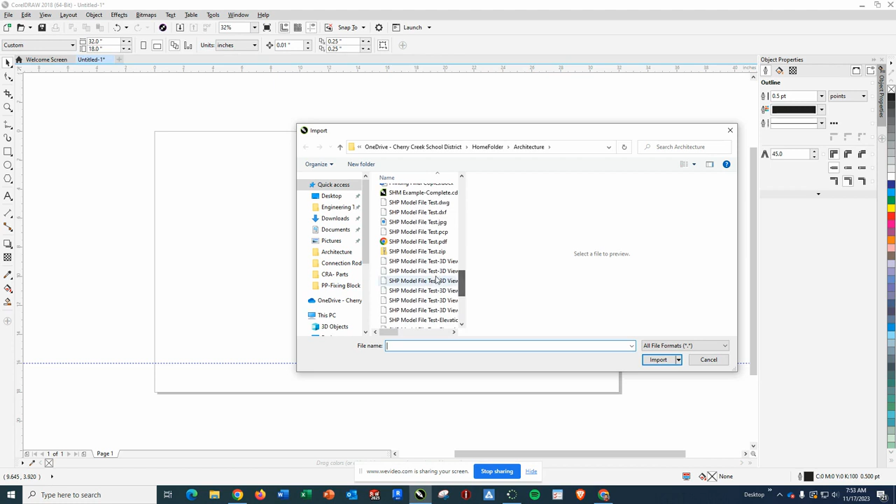So we'll go to Import. We will go to our folder where we've saved everything. We will find our house model PDF. We're going to go ahead and import, and it's going to import text as text, which is fine because we'll actually get rid of it. And I'm going to put the top corner up in the top corner here. And it's going to put everything down on the board. And it looks like all my edges look pretty good.

So now here's the first thing I'm going to do. I'm going to change the outline color. We want to do it first down here to make sure we set the color panel right. So the first thing is we're going to change width to hairline. All of our lines need to be hairline lines. Second thing, we're going to change the color.

Now we want to go to the color swatches. We want to make sure that we're on the RGB palette. So if yours doesn't say RGB, drop it down, go to the RGB palette. You can see it's the last one listed. It's not CMYK, it's RGB. You'll notice there's a difference in the blue. The blue in RGB will be a much brighter blue.

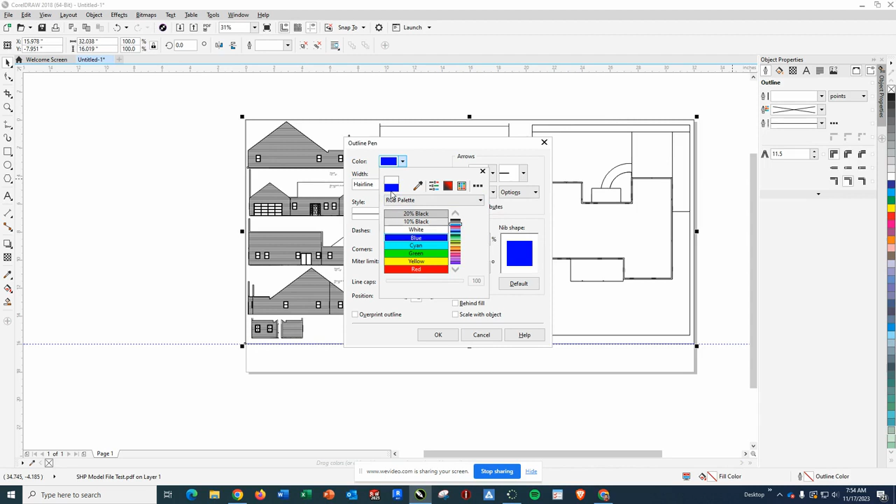If you're not seeing the names, you can hit the 3 dots right here and tell it to show the color names. It's just real helpful here. So you do want to pick blue. Again, it wants to be the RGB blue, so it's this nice brighter blue. We're going to hit OK, and it should turn all the stuff to be blue lines.

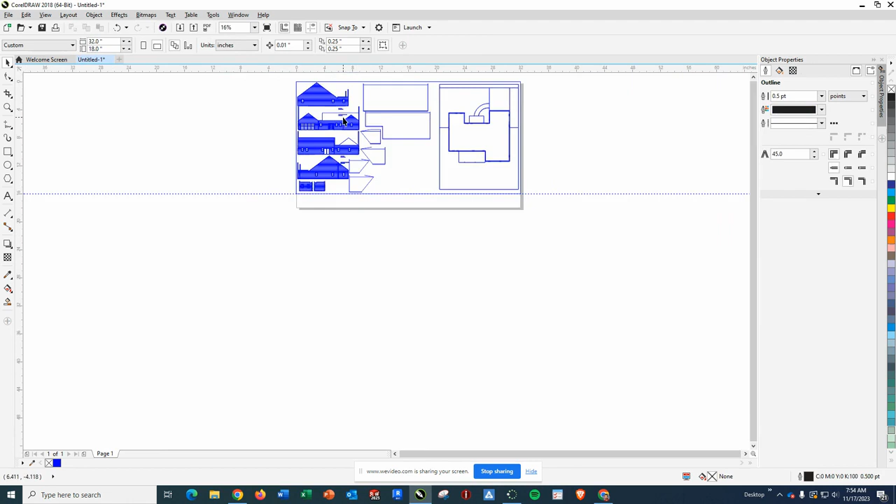Now, what I will also do is right-click this and say ungroup all objects. Make sure you pick all objects because that's going to break everything apart into its smaller pieces. So now I can come in here, and where I have text, I can highlight it and delete it and get rid of it. All right.

Now, there is a lot going on. So we're going to look for a few different things. First off, there are some parts of this that you don't actually need. For example, in my view here, I have a small partial wall that I have the complete view of down below. So I don't need any of this right here. So I can surround that with a box and hit delete and start getting rid of some of that stuff.

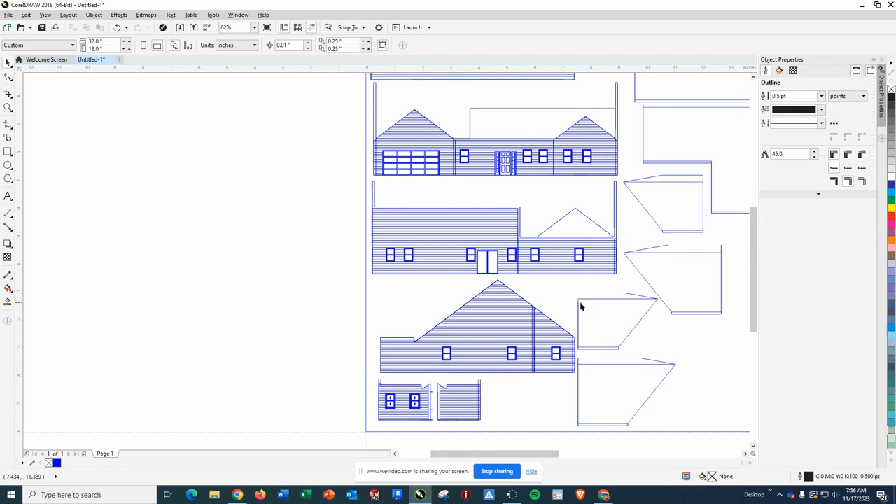Now, as you'll notice, there are some times where some lines overlap. So you can click on them and delete those lines so that they go away. And that's going to be a much better look right there. So that'll work. The other thing is you can see that some of these, where the wall hits, I see 2 lines. So I can click on the extra line and get rid of it. And again, it might be there a couple times.

And I'm going to do the same thing here. Actually, it's this line that I won't need. You can see this one's a little bolder. That tells me that it's the actual edge. All right, so I can clean some of these views up like this. I accidentally got rid of one of the lines there. That's actually okay because I'm going to end up tracing this.

If you have any of the window symbols that have the arrows in them, you'll want to delete the arrows. Some of these where you're looking at a big sloping roof surface, this upper line actually can go away. That's not where it ends. This other line here is where it ends.

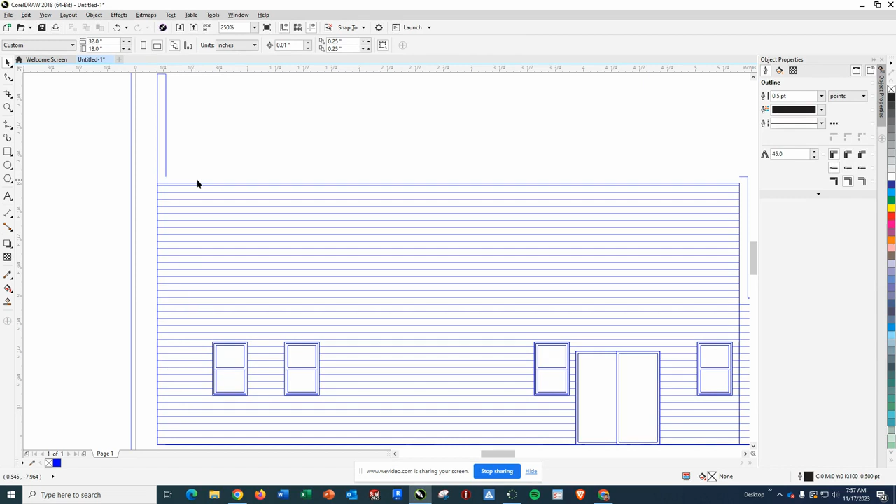And just be careful. Just understand how your selection tools work. If I drag a box and something is fully included in that box, it will select it and it will delete it. So you can clean up some of these views, and as you can see, that went in. This line is not needed.

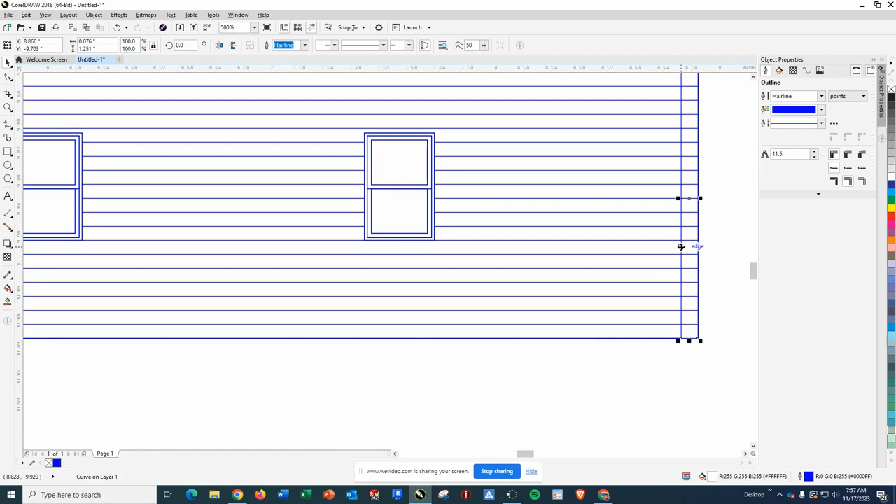Again, just be very clear as to what you're actually deleting to make sure you're not getting rid of something that you need. I'm not going to make you watch me do this whole thing, but I did want to do parts of that. All right, so that's cleaning up the wall section. Let's come to the other side over here where my site plan is. First off, if you have a bunch of stuff inside your house, you can put boxes around it and delete it. We're only really using the outside line here.

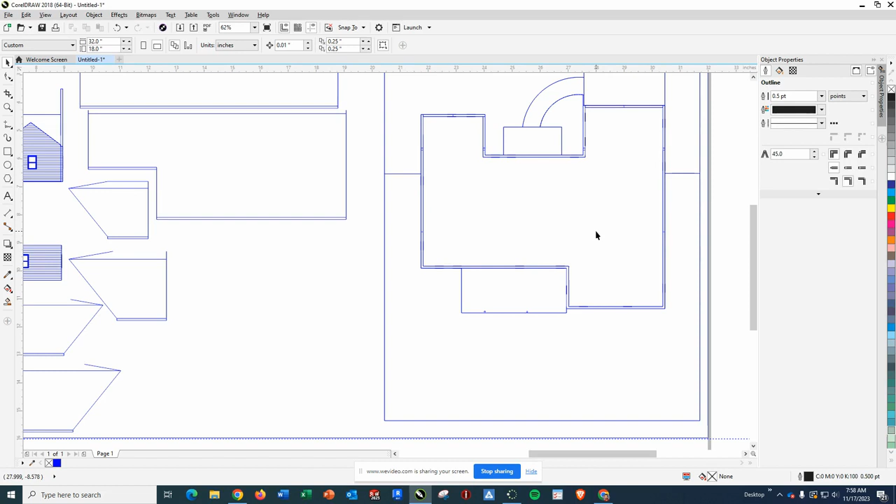I mean, I'm going to leave the whole wall there showing, but really what I need is that outside line that's going to help me to align the walls when I put my model together. Now, what I do need to do is change the very border of this, because blue will engrave on the board, which is great for a lot of these features. But we also want the laser to cut in certain places. So I'm going to click on some of these lines and change them to red.

This is where, again, the object properties, you can see the blue's right here. And if I just click on it, I can change that to red. And I can actually do several parts at once. If I would like to, I can hold shift and click multiple lines. And I'm just going to go ahead and change them to red right now and see if I'm missing anything.

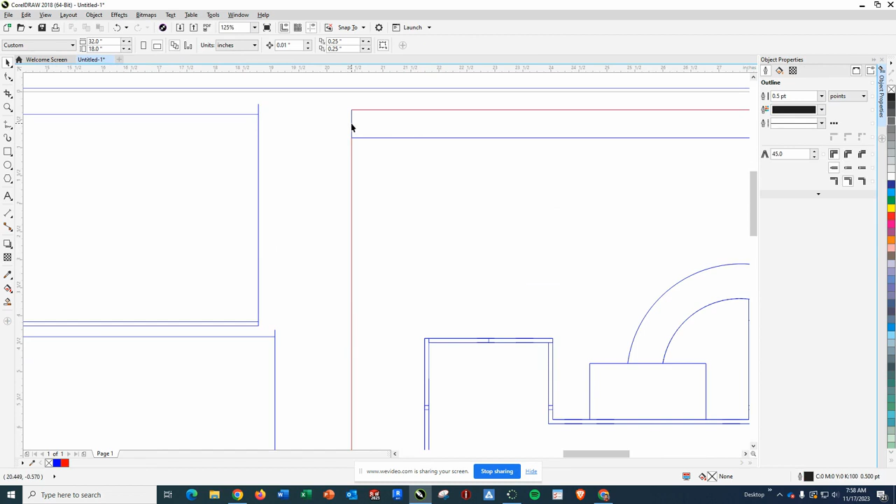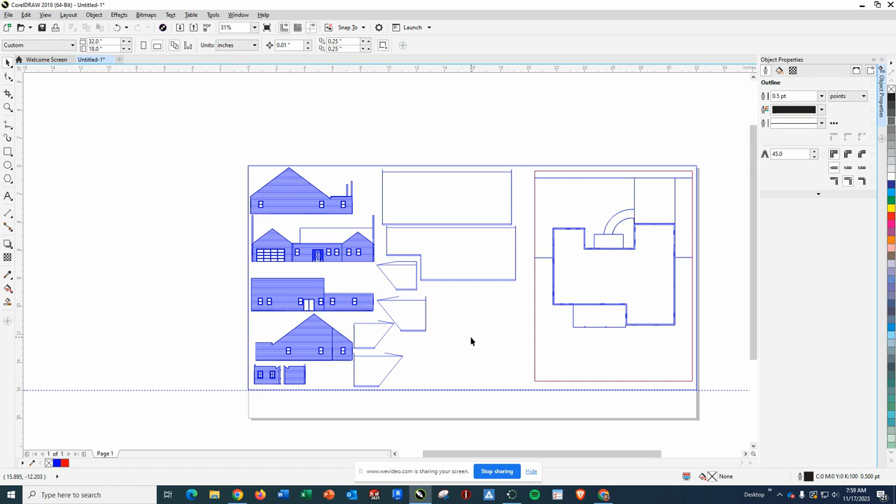I think I'm missing the ends by where the sidewalk is. Yeah. So we'll grab that line. I think I'm missing the same one on the other side. Yes, I am. Change those both to red. Perfect. So where the lines are red, the laser will cut through the material. Where the lines are blue, it will just burn a line into them, and that's exactly what we want for this.

Now, on my roof pieces here, I can do some cleanup there as well. I'm just going to come down to one of these, do a little cleanup as far as the extra lines go. I don't need those. I don't need the angled line. I actually don't need this edge line here. I really just need the panel. Because remember, these are, sorry, if we drag this way, we can get that. This is really just what I need.

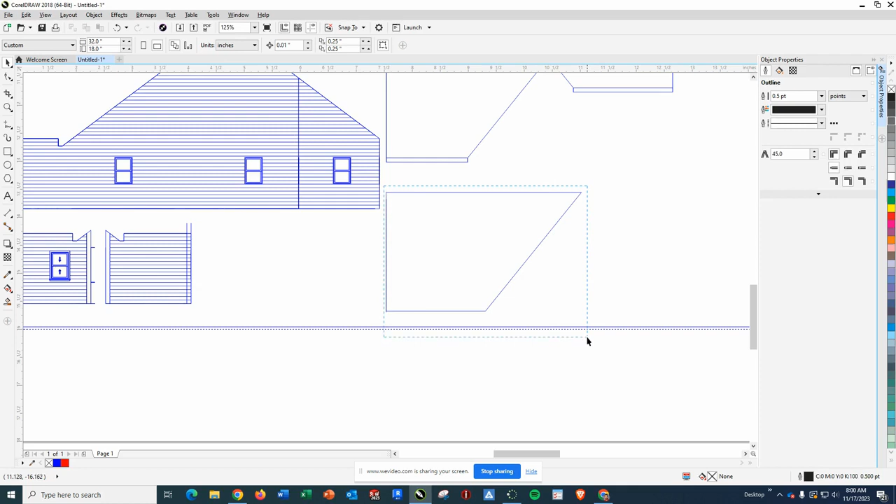By the way, you can, if you'd like, click on this and move it around. But what you need here is your lines to all be red. Okay? Because that's what it's going to do. So I'm going to do all of my roof panels like this. Okay? Real quick, just to make other stuff a little easier, I'm going to move this one as well. Lastly, I'm going to come over to the walls.

Now, you've seen me, I've already done some cleanup with the walls. What I want to do is, first off, if you see any of the lines that look extra bold, especially in this view, you can see the bottom line here looks pretty thick. You've just got a bunch of lines that are over top of each other. So you can sit here and kind of clean this up. One of the other things you could do is highlight just that bottom area there and delete it, and you still have a guide right here, which will be fine.

So I'm going to come over here and find my 2-point line. And when I set my 2-point line, I want it to be hairline and red in the RGB menu. There we go, RGB palette. Down one, here's red. So again, we're red and we're hairline. And I'm going to go from the node there. This one, since I deleted the line, I don't have a node, but I can watch myself draw horizontally. And I can draw from node down to perpendicular.

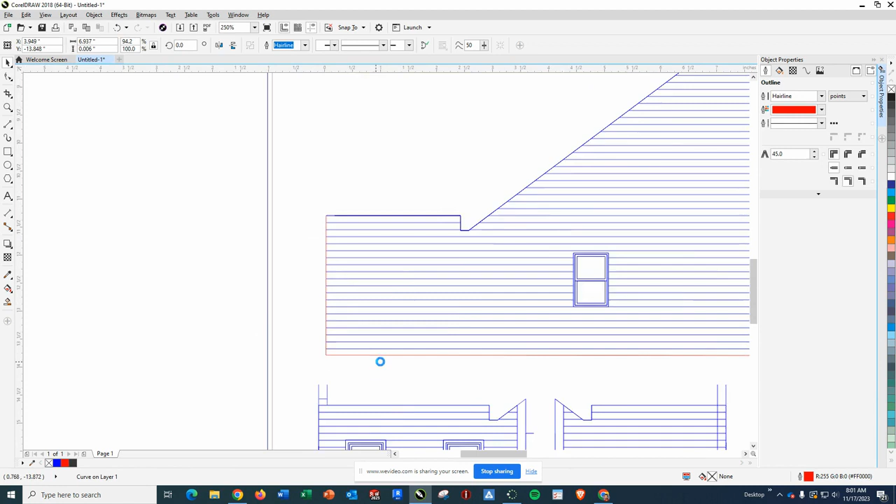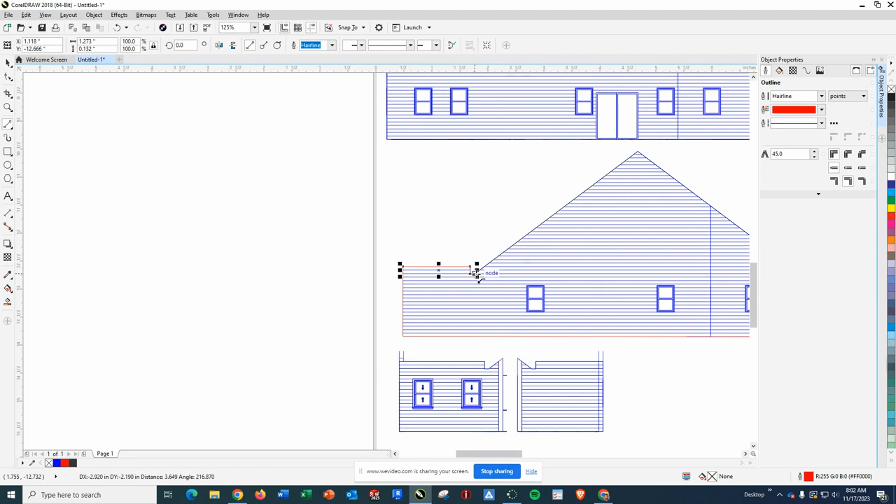And then I can come back, if I get my pointer tool, and drag this back to the node. So we are like that. Perfect. I've got some extra lines, it looks like, up here. So I'm going to basically just delete that whole top area there and go from node to node, node to node, node to node. Now, I like to be able to see the other end, so that's why I'm going to zoom out and go node to node there. Perfect.

Go node to node here. And we'll go node to node down there. And then where the line needs to be cut, I'm again going to go node to node. So I'm going to do that on all my sides, anywhere where I need a cut. So if I have a wall that needs to be separated in the same view, I will draw through it. But basically, I'm going to trace right around it. I can get rid of the walls, especially if there's extra lines there. But take your time doing that. And you're going to complete that on your entire drawing here.

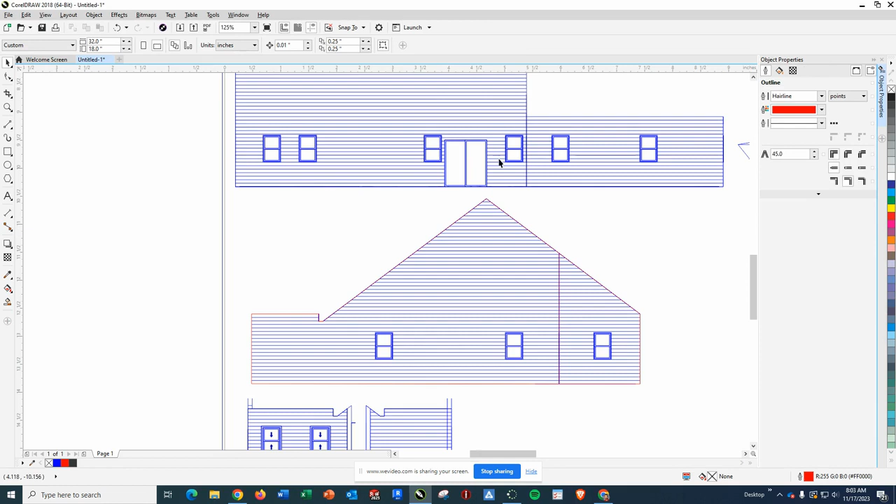So when you're all done, or during your progress, when you do save or save as, you're going to want to go into This PC, scroll all the way down, find EHS, then Student Share, Engineering Tech, Lab Share, and find the folder for our class. In the folder for our class, make a new folder, name it your last name, a dash, and then your first initial. Open that folder up, and in here is where you're going to want to put your engraver file.

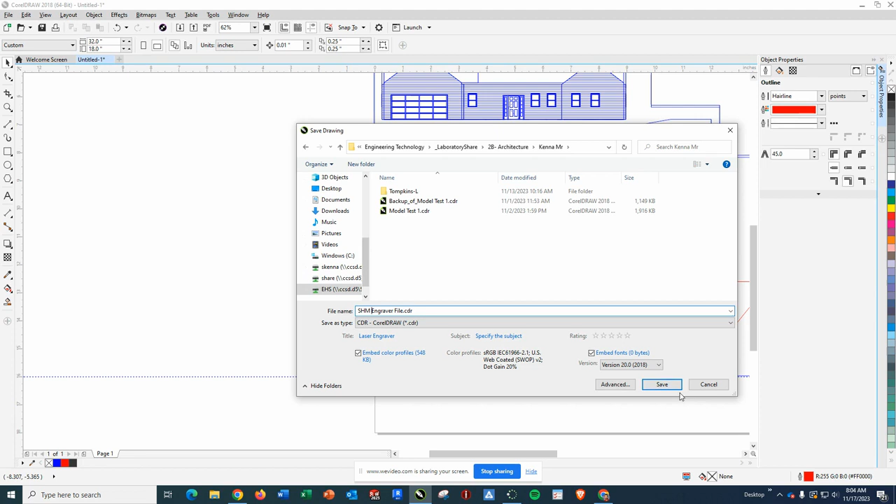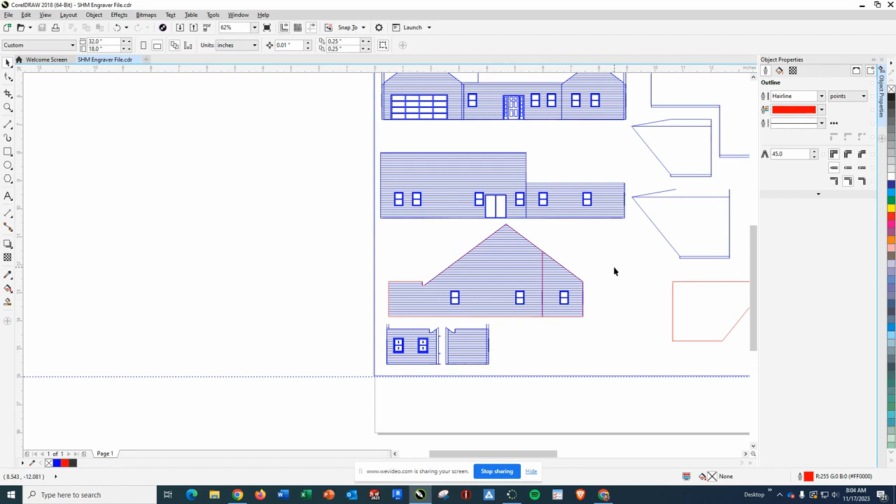Name it something that makes sense. Mine is going to be Simple House Model Engraver File, and in here is where it goes, and I'm going to hit save. And again, make sure you do this to all the roof stuff, but get it all the way finished before you go to cutting it. But this is how you create the model file. Also, don't forget, you do have to turn a copy of this file or a picture of the file in on Schoology to show that you've done all the work.